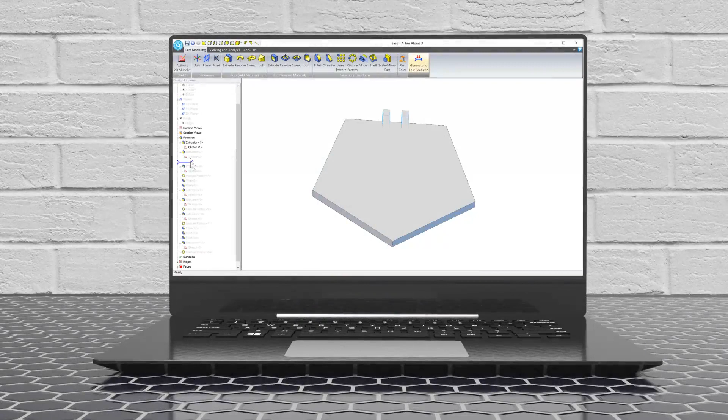Alibre Atom3D is the tool you need to bring your ideas to life. You can design just about anything in Alibre Atom3D, including woodworking projects, robots, scale models, structures, toys, art, and more. Here you can see how we build up a part in a series of steps called features.

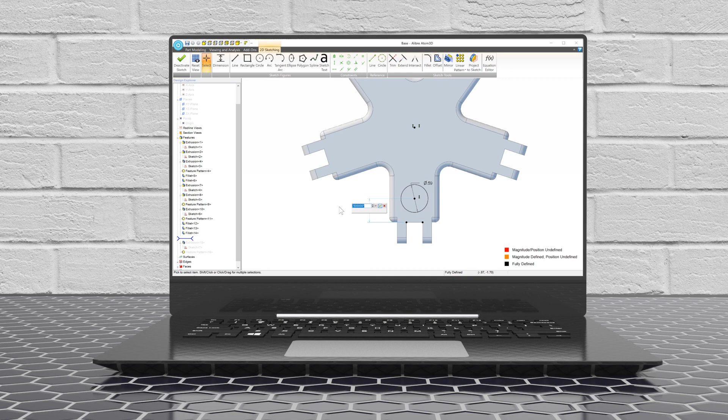One advantage of Alibre Atom3D is that changing stuff is super easy. Just click it and type in a new value. In this case, we'll change the position of the hole and watch the pattern update.

After you've made a part, you can combine it with other parts in an assembly. After setting up a few things, your assembly behaves how it would in the real world, allowing you to test lots of things like range of motion.

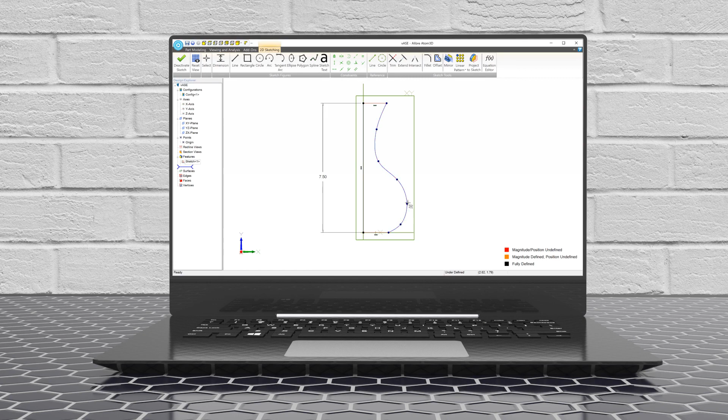While Alibre Atom3D is capable of extreme precision, not everything really needs it. Here we're just going to define the height and width of a 3D printed vase we're making, and then we'll eyeball the decorative details. We can sketch some circles that will eventually become holes, and then we'll make a pattern to form an interesting shape. Now we'll add the finishing touch by smoothing out the edges with a fillet.

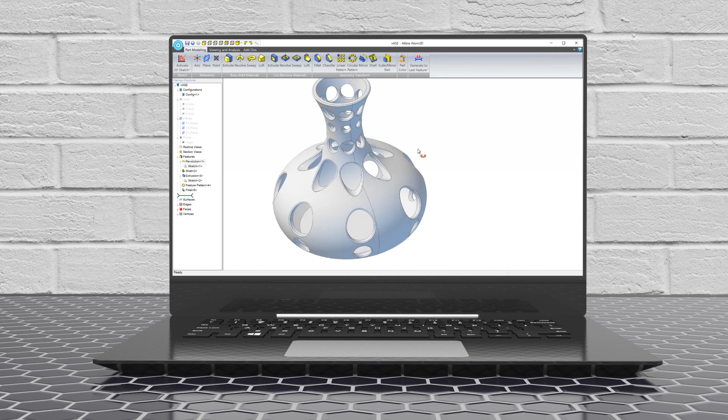Your creativity, combined with how easy it is to make simple or complex shapes, means unlimited potential for your projects, and you can make changes at any time. When your projects get more complex, you'll love the ability to make section views so you can see how your internal parts come together. This is super important when you need to make sure that you don't have overlapping parts.

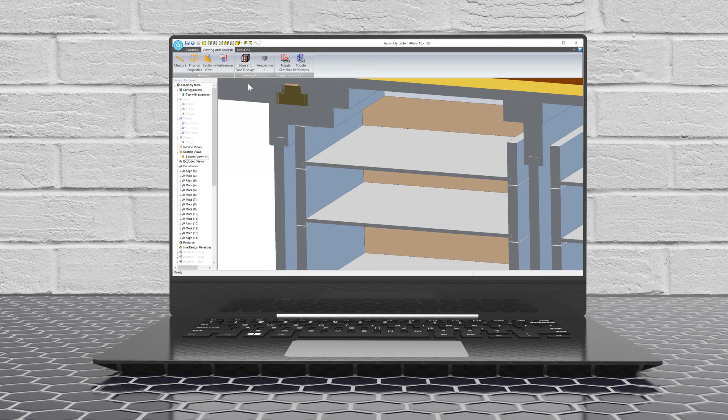And Alibre Atom3D has a special tool for this called interference detection, which analyzes the design and shows you where the overlaps are so you can fix them. Spend a little time now in software and save a lot of time later on the shop floor. Now that you've got the basics, let's see it in action.

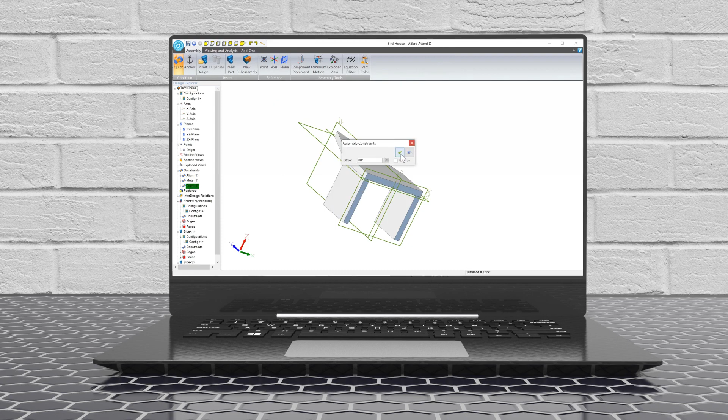All parts share a similar workflow. You start with a 2D sketch. Those are the red lines with squares and circles and other shapes that you see. And then you create a 3D feature from that sketch. You'll keep adding and removing material until your part's the right shape, and along the way, you're always adding dimensions to make sure everything's the right size. Now onto the fun part.

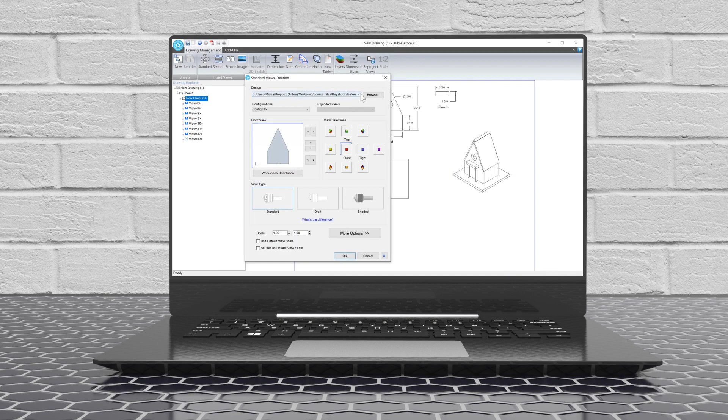If you're going to build something yourself, especially out of wood, it's likely that you'll create a 2D drawing. Getting the 3D model into the 2D drawing is an automatic process. Then you add dimensions or change the layout as you like to make your trip to the hardware store super easy. You can create exploded views for an easier assembly later.

Maybe you're the kind of person that loves to make small wood projects, or perhaps you're more into making shelves so you can store all your 3D printed artwork. Maybe you're making a crazy invention with your CNC machine, or cutting some gifts with your new laser cutter. Or with some luck, you're going to the finals in your school's robotics competition. Regardless of what your project is and how you want to make it, Alibre Atom3D is your starting point.